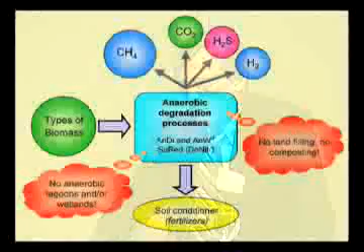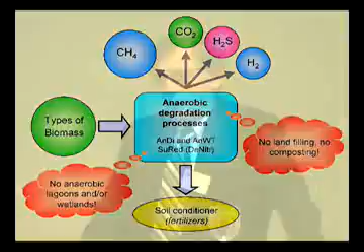So we have these types of biomass. The first process we need to apply is anaerobic degradation. Conventional anaerobic digestion processes or high rate anaerobic wastewater treatment processes. It can be also sulfate reduction. If we have anaerobic digestion or rotting somewhere in nature, we smell it because of the H2S or other volatile sulfur compounds. So everybody is warned. Something is happening there. But what we want is to use this process in the proper way.

Then we generate from biodegradable organic matter methane. Of course, it's a resource. It is an energy resource. CO2, some H2S, and possibly hydrogen, just by manipulating the system. But very important, we also produce soil conditioners.

Anaerobic treatment is the first step for removing biodegradable organic pollutants from a waste or a wastewater. I don't support, maybe we can have discussion about that, the use of lagoons or wetlands. I don't support it because they are very extensive treatment systems, and in fact we don't recover the energy produced from the digestion processes taking place in these systems.

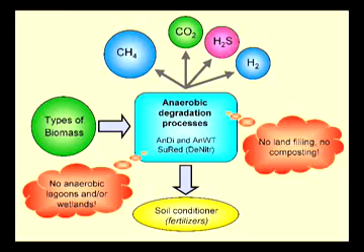The same, I don't like landfilling. It is old-fashioned, for the same reasons. And also not composting, because with composting we convert biodegradable organic matter into heat, but low-calorie heat, so of little value. So this is the heart of the system. But it is not a complete treatment.

The effluent of the anaerobic treatment system contains the nutrients: ammonia, phosphate, volatile sulfur compounds, salts. So we cannot discharge the effluent of an anaerobic reactor into a surface water. We could use the effluent for irrigation and fertilization. So that is the first step to a further valorization.

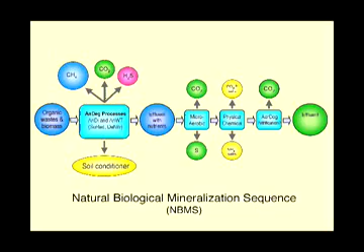But the point is, I'm going to emphasize several times, the more concentrated we keep our waste, the less diluted, the more concentrated is the effluent with respect to ammonia, phosphate, and these kind of very valuable fertilizers. The next step: we removed already all biodegradable organic matter in the first step. So what is left is just found in the soil conditioner.

The next step is a microaerobic step. Just putting in a little bit of aeration in order to get rid of malodorous compounds, H2S. And we saw this many, many years ago in the first anaerobic reactor, a kind of a white precipitate at the liquid-gas surface interface of the reactor, and it turned out to be sulfur. And later on, we started doing research in order to find out what is happening. It's a biological microaerobic conversion process, extremely interesting.

Next step is physical chemical treatment in order to recover in a very concentrated form the ammonium phosphate. And the last step, so we don't refuse to use any of the conventional processes, is an aerobic polishing step. Then we have a fine effluent, an extremely well-treated effluent at a very low cost. This is the natural biological mineralization sequence principle, NBMS. I hope you took it, because I'm going to speak about it again and again.

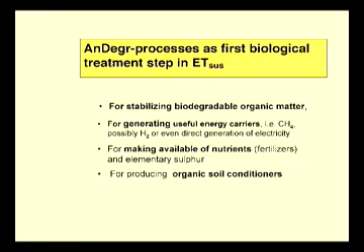This microaerobic first post-treatment step is extremely promising. It is the conversion of H2S, but also other volatile sulfur compounds, into elementary sulfur, which can be easily separated from the liquid. It is applicable for the removal of H2S from natural gas. It is already applied for this objective. A Dutch company, Paques, is working in this field very much. Shell, the big oil companies, they are interested in it. But it's also for the removal of malodorous compounds, these stinking compounds.

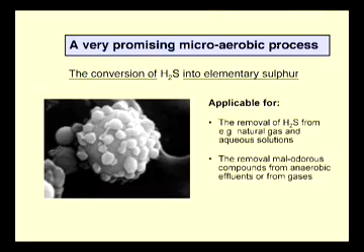It is microbiology, and I am a technologist. I didn't explain it to you, but you already understood it, I think. I was educated in Wageningen in physical chemical treatment, radioactive wastewater, but started working in 1970 based on a paper I will mention a few minutes later. And this is, you see, these organisms. This organism is excreting elementary sulfur. And we did this work in very close cooperation with Professor Gijs Kuenen from the Technical University Delft. He was here for 2 months. Very good cooperation. We did the technology, he did the microbiology.

So, supplementary conditions to be met for realizing waste valorization. It is not merely using this NBMS principle of treatment, but we need more. It is extremely essential. We need proper collection systems and transport systems for the residues. In fact, what we need: keep these wastes and wastewaters as concentrated as possible. Don't waste any clean water.

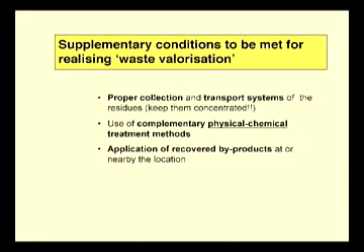Use complementary physical-chemical treatment methods to refine the recovered byproducts. Of course you can recover what you want, but if you don't use them, it makes little sense. So we have to use these recovered byproducts nearby the location for agricultural purposes. This is a kind of sustainable environmental protection, directed to pollution prevention, a high degree of self-sufficiency and robustness, and waste valorization.

We have a lot of tools to realize this. I don't want to go into detail since this is a general lecture, but just one thing: we should focus on transport limitation, not all these huge transport systems. I'll come back to that. And focus on sustainable innovations, meaning innovations which serve all people.

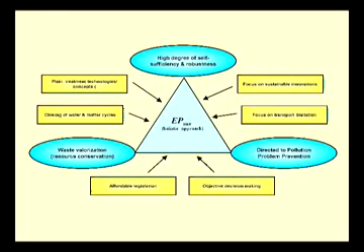So I think with this sustainable environmental protection, we also make a step towards a more sustainable future for our human society. It will help us eliminate the waste of mineral, natural and human resources. It's negative, what I'm saying now, is negative. I don't want to speak about negative things, but we live in this world, so I have to mention some.

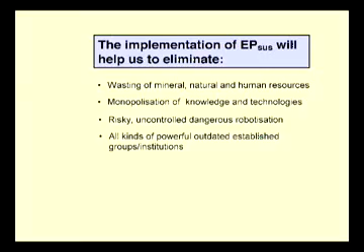Monopolization of knowledge and technologies, that is what we're doing day by day. Risky, uncontrolled, dangerous robotization, all kinds of powerful, outdated, established groups and institutions. Not so easy, but we have to get rid of it. I don't know how, but maybe anaerobic treatment could help. You are laughing, but I think it is too.

That was the first article I read when I came to Wageningen, knowing nothing about biological treatment. I don't know how or why, but I took this paper out of the file a few weeks ago, because it was still in Wageningen. I have it now, it is very valuable. So, Perry McCarty, he brought me on the way.

And at that time, there was the philosopher Teilhard de Chardin. I read his book and tried to understand it. I understood something, and made more or less my own philosophy from his ideas. But anyhow, he said a truth even seen by only one person will irrevocably find its way. I just looked to Perry. So what did he do?

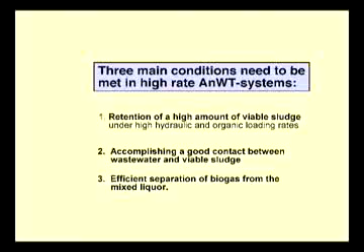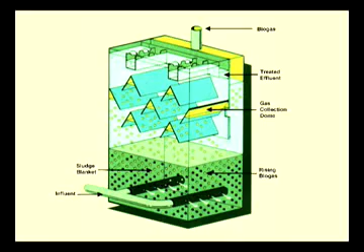The great advantage of anaerobic treatment compared to aerobic wastewater treatment is that it is resource producing, not demanding. We don't need any electricity. No excess sludge problems, because these anaerobic organisms grow very slowly, and the sludge we are creating in this reactor is extremely thick, so the volume is very small.

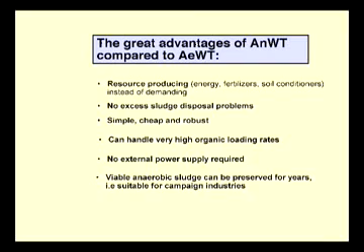It is simple, cheap, and robust. It can handle very high organic loading rates, up to 10, 15 times as high as conventional aerobic treatment systems. No external power supply, already mentioned. And very important: viable anaerobic sludge cultivated at some time of the year can be stored unfed for 6 to 10 months, and when you have new feed, a new campaign industry, you simply start feeding again.

Drawbacks—you always have to speak about drawbacks. I have problems with that when speaking about anaerobic treatment, because I don't see any drawback.

They speak about slow startup. This is just true the first time. But once you started your system, you harvest the sludge, conserve it, store it, and you can reuse it for new reactors.

So no problem anymore. Malodour nuisance? No, because we have this microaerobic post-treatment. Susceptible? All organisms are susceptible, aerobic or anaerobic. But if you know what you do, there is no problem.

Not a real problem. Little full-scale experience - not anymore, except in the public sector. Public sector, I mean sewage treatment. I'll come back to that.

It is true, anaerobic treatment systems just merely remove the organic pollutants. For me, it is a benefit, provided we meet the condition: keep the wastewaters as concentrated as possible, or in case we can reuse the effluent for irrigation all year long.

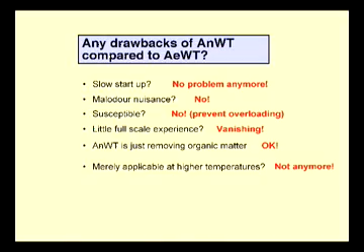Merely applicable at higher temperatures - this was the case. But as a result of all the research made during the last four decades, we know the system can be applied at very high temperatures, thermophilic conditions, and very low temperatures, even down to 4 degrees centigrade.

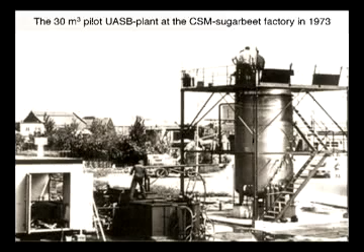This is a pilot plant installed at a sugar beet factory. It was extremely successful. And here is the group of people working on it - they're a little bit older now.

Extremely interesting, this UASB process is the formation of a very well-settling, very active granular sludge. This is so extremely fascinating for all kinds of disciplines, and so important. This granular sludge, up to 2-3 millimeters in size, is very well settling and extremely active because it is composed of viable consortia of anaerobic organisms. But there are a lot of questions.

I'm not going to go into detail, just mention a few. What is granulation? Okay, I will say something. Why, how, when does it develop? How does it grow, reproduce? Very interesting - maybe I'll say a few words. How can it be manipulated? This is fascinating for scientists. How can we cultivate a granular sludge which we want? And how can it be applied, for technologists?

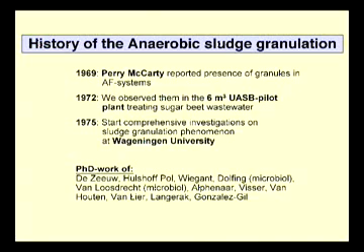And we started very comprehensive research. We observed it, we were fascinated by it, and so we did decades of research - PhD work of a lot of PhD students in the field are here. I will show them a little bit later.

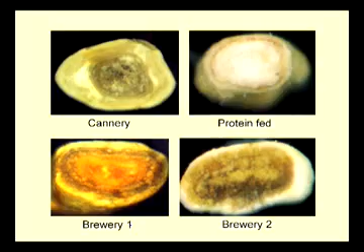We have many different types of granular sludge, depending on the wastewater we treat. Here are the pioneers - one is here, Look, where are you? He was the first who started doing the research in this field. And Jules van Lier, he did it in thermophilic conditions, but they did a lot of work in many other fields in this anaerobic treatment story.

These granular particles augment smoothly in a UASB reactor through a mechanism of occasional fragmentation. The how and the why is interesting, but not a point of discussion now.

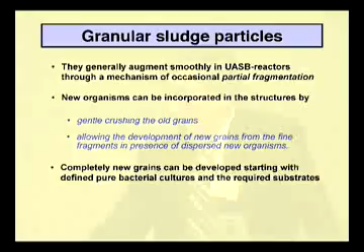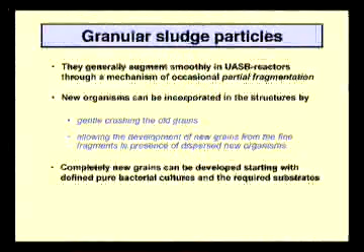New organisms which we need for a specific type of wastewater - because if we want to treat a very new type of wastewater with xenobiotics, we need new organisms, and they should be incorporated into the structures, into the old structures. This can only be achieved by gently crushing the old grains and growing them, allowing them to develop new grains together with these organisms we need.

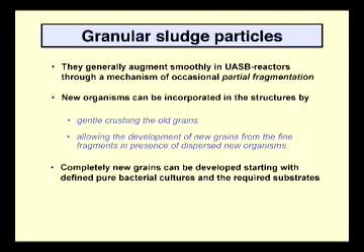And we can, of course, develop completely new grains based on pure cultures. All these kinds of things, a lot still has to be done.

Reasons for optimism to get sustainable environmental protection processes implemented: the industrial sector, since '76, very significant progress. First of all, in proper collection. They kept the wastewaters concentrated and separated, little if any dilution, minimizing transport, not all these huge sewer systems. They implemented this NBMS-based treatment technology, and we have excellent business by the companies, the contractors doing the job.

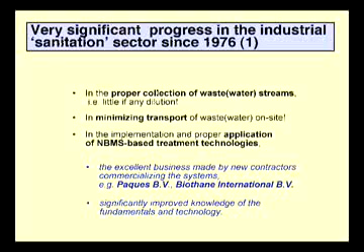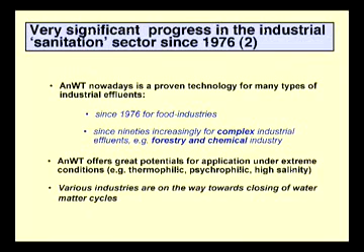Paques and Biothane, and of course there is a significantly better understanding of the basics and the technology of the system. Since '76, the system is applied for many food industries, but increasingly also for complex industrial effluents, forestry and chemical industries. It has a lot of potential for application under extreme conditions: high salinity, high temperatures, low temperatures. And many industries are on the way towards closing water and matter cycles.

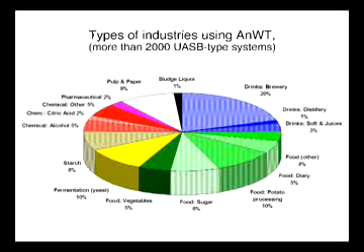Here's just an overview of the industries applying the system, particularly breweries, food industries, but very especially also pulp and paper industry. And Jim Field, you heard him, you saw him, and you should hear him many, many times again.

He did a very big job in this field. He was the second American who had a tremendous impact on my life. Positive, huh? Positive impact. And he was guided by Reyes. She did the same in this field. So she supported him, she guided him, and she did the same with me, together with Dora, of course.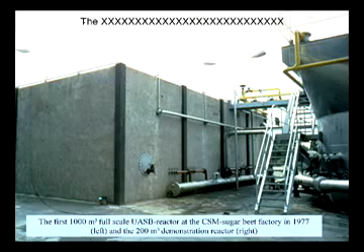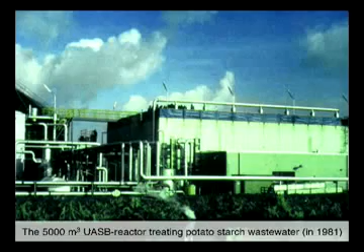This is the biggest UASB reactor we have, I would say had, treating potato starch wastewater in the northern part of Holland. A very difficult type of wastewater. Just one difficulty I want to mention.

This one was installed in '81. Campaign industry, only two months, a tremendous big reactor, no seed sludge available, very difficult type of wastewater. So how to get things going?

What we found in the laboratory: the sludge, the anaerobic bacteria, completely converted the pollutants into methane, but they didn't grow. We didn't have growth of new bacteria, which is essential. Only after we added a mixture of trace elements did the bacteria start growing. So this is one of the very fascinating things of anaerobic treatment.

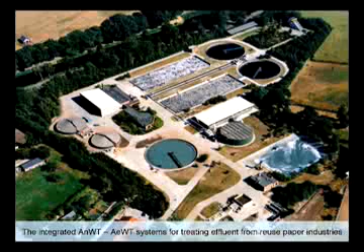Here's a paper, reuse paper industry. The anaerobic reactor is here. This is the first one, the second one, because more and more paper is reused. And the old aerobic treatment systems are in the back. And the biogas is treated to remove the H2S.

Then we have an expanded granular sludge bed reactor. It is using granular sludge, can apply very, very high loading rates. They are very tall reactors.

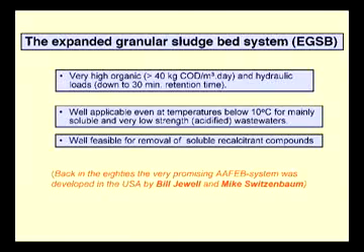I just want to mention the work in the United States made in the 80s, Bill Jewell, Mike Switzenbaum. It's more or less exactly the same system, but we used the granular sludge, and they used inert carriers on which biofilm was developing. But it's an expanded bed, not a fluidized bed. And here you have these tall reactors.

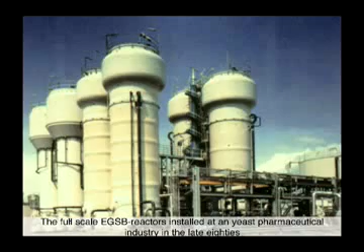Initially they were intended to be used as fluidized bed, complete fluidization, but it didn't work. It didn't work because we have detachment of the biofilm. So then later on, they started using the granular sludge. It was very successful.

So I just want to say something about the public sanitation sector. A very different story. I speak about the modern urban public sanitation sector. The collection is wrong. Concentrated domestic waste is flushed away with a lot of water. We have very big, expensive, vulnerable transport systems, the sewers. Non-sustainable—every 40 years we have to rebuild them.

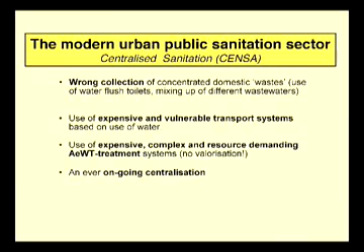We have these aerobic wastewater treatment systems which are energy demanding. And I hope I explained we don't need them if we do the proper job. It is going to get bigger, bigger, bigger. This is what you know, what I want to have eliminated. So we need a new paradigm in the public sector. I hope this is clear for you.

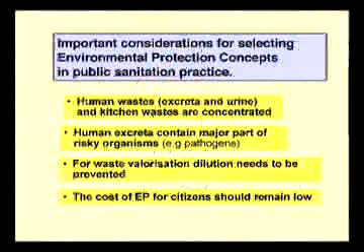We need prevention of pollution of clean water, no misuse of tap water to flush away our concentrated waste, and we need valorization of the residues. And why? I already mentioned some reasons, but first of all, human waste—excreta and urine—and kitchen waste are extremely concentrated. We got it from nature. Human excreta contain a major part of the risky organisms, the pathogens.

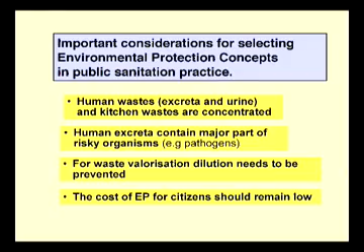So why dilute this? Why should we create problems? We create problems. For waste valorization, we shouldn't have dilution. It makes everything more difficult. And the cost for environmental protection for the citizens should remain low.

Just for illustration, urine contains 85% of this nitrogen. Feces only 11.5. So the black water, combined excreta and urine, 96.5%. Organic matter, mainly in the feces. Phosphorus in urine and feces. Potassium, especially in the urine.

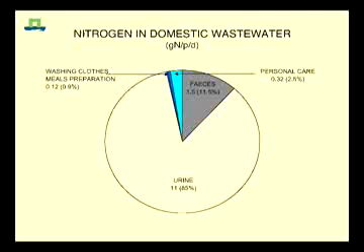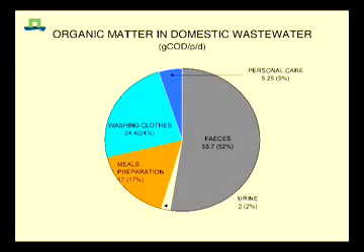So I already presented this in the table, but you can see here the urine containing almost all the nitrogen. Here the organic matter, especially in the feces, in meal preparation. So if we combine these two, we have almost 70-80% of the organic matter. The P and the potassium.

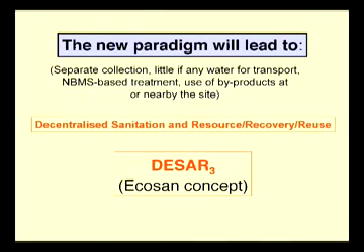So the new paradigm, the separate collection, no water transport, the NBMS-based treatment, etc., will lead to decentralized sanitation and resource recovery and reuse. DESAR. That is what we promote. Or Ecosan. And Grietje Zeeman, she is also here somewhere. She is the big woman in our department working in this field and promoting this very much in Holland. And even from the established public sanitation sector, she gets more and more support.

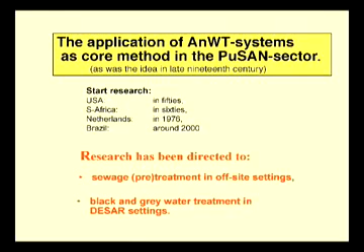This research on wastewater treatment using the anaerobic wastewater treatment system already started in the United States in the 50s. Later in the 60s in South Africa, in 76 in the Netherlands, and around 2000 in Brazil. And the research has been directed to sewage and black and grey water treatment. Sewage treatment as a first step, and black and grey water.

I want just to present, in my opinion, a very ideal solution for the public sector. It is just recently developed. We are going to introduce this with a group. The greenhouse village concept. It is a very holistic approach. We need a lot of different disciplines, sanitary, chemical, civil engineers, biotechnology, etc. Even lawyers, I think.

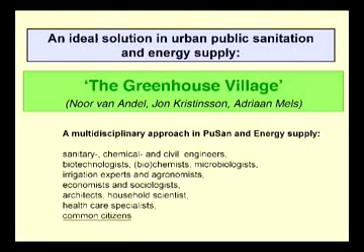And what is the idea? Very shortly. We have the greenhouse, and I just speak about Dutch conditions. We have the greenhouse for collection of heat during summertime, using a very sophisticated new type of heat exchanger. And the heat is collected using the groundwater, and the warm groundwater is reintroduced in the aquifer. This greenhouse, it is a closed greenhouse, also produces food, crops, and clean water, condensed water.

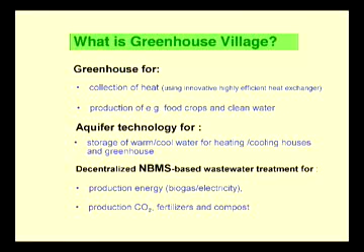The aquifer we use for storage of warm and cool water. So warm water to heat the greenhouse during wintertime, and the houses of the community during wintertime, and in summertime the reverse. And we combine the system with the NBMS-based wastewater treatment system. So we have a community, minimum 200 houses, apartment buildings or whatsoever, and the wastewater from that community is treated anaerobically, producing energy. The biogas is converted into electricity, and the CO2 from that is reintroduced in the greenhouse because we need CO2 for breeding the plants. This is the concept.

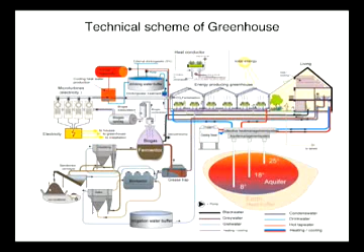It is relatively high-tech, but if we use high-tech in the proper way, for common interest, I think there is no objection against high-tech. It is not super high-tech. And in the public sector, we can only introduce these sustainable concepts step by step because we made huge investments in the centralized systems and in the sewer system, etc.

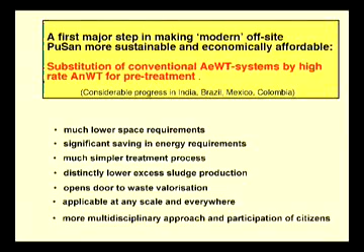So step by step, and the major first step in making modern public sanitation sustainable and economical is substitution of conventional aerobic wastewater treatment systems by high-rate anaerobic treatment systems. And the reasons for that I already mentioned several times: lower space requirements, saving energy, etc. So I don't want to go into detail.

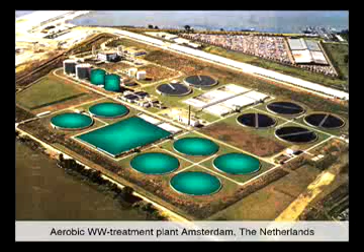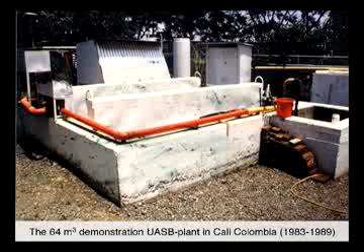Here we have the sewage treatment plant Amsterdam with aerobic treatment, with sludge digesters, with all kinds of settlers, primary, secondary. But if we replace the primary settlers and the aeration system and part of the post-settlers by one anaerobic pre-treatment step, we save a lot of space, even in our moderate climates, but especially in developing countries. And here we have a pilot plant, which was installed in 1983 in Cali, Colombia, in order to demonstrate the feasibility of the system for domestic sewage treatment.

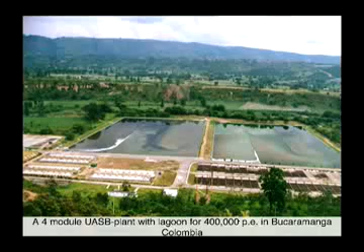Colombia, the same story. We have anaerobic treatment under construction here in the foreground, and effluent post-treatment in a lagoon. I just want to say something about renewable energy production from biomass.

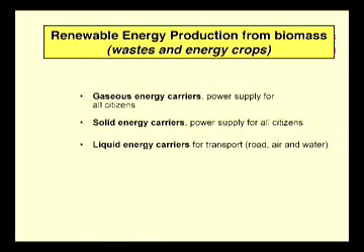So what about that? It can be gaseous energy carriers for power supply of the citizens, methane, for example. Solid energy carriers for power supply of the citizens. But also liquid energy carriers, which have the big interest presently. And anaerobic digestion processes comprise, to our idea, a superior system for producing renewable energy from wet types of biomass.

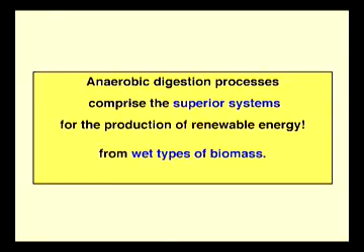I am going to show you this. Just focusing on sugarcane, so Brazil. Of course, everywhere presently, in Holland, in Europe, United States, they want to produce alcohol, just for the car. So, considering what is going on, the net energy production based on the energy content of the sugarcane is only 38%. The effluent of the fermentation process contains about 10% of the net energy,

but it is used in the fields for irrigation. So the energy present in the organic pollutants is lost. And half of the bagasse is also lost because the other half you need for distillation. We can use the anaerobic treatment system. Then we have a net energy production of 48%, including 10% of biogas produced from the wastewater.

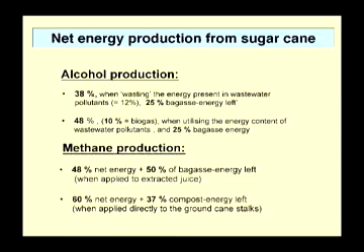Or if we crush the sugarcane stalks and we apply direct anaerobic digestion, we have 60% net energy production and a lot of compost. So it's much more sustainable. I don't want to speak about that anymore. This is what is our fate, also in Europe.

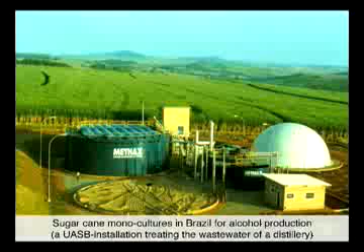In Brazil we have these monocultures of sugarcane. This has to be in bigger and bigger areas. It is not biodiversity, I think. It's the contrary. The politicians in Europe and also oil companies, they want to force us in the same direction. We don't have the land. We are destroying our landscape just for making liquid fuel.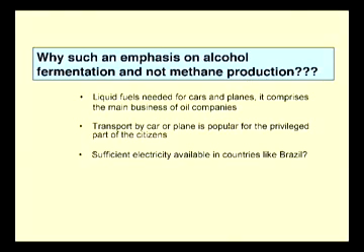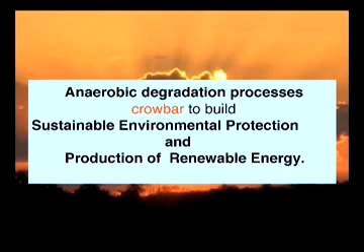And that is what I said, and it is written down here, and I'll leave it with that. And I come to my summary and conclusion. I hope I made clear that anaerobic degradation, we need it. It is natural, and it leads to new creative life for everybody. We should use anaerobic degradation processes. It is the crowbar to build sustainable environmental protection and production of renewable energy.

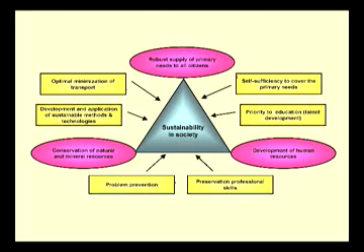And along with the development and implementation of sustainable environmental protection, we make progress to, that is what I hope, that is what I want, and that is what I expect, a more sustainable society. And a sustainable society, it is development of human resources. It is a robust supply of primary needs to all citizens. All citizens. It is conservation of natural and mineral resources.

And we have a lot of tools. Just a few here. I am not going to explain this or go in detail because it is a matter of discussion. So we want to go, I think all of us, towards more sustainability in a globalizing world. To my opinion, there are two main criteria for sustainability. First of all, it is resource conservation, fossil energy and chemicals, and biodiversity in nature.

Secondly, maybe even more important, the well-being of mankind. Social security, work for everybody. Also, they should take the work. Spiritual development. And the priorities to be put: the first priority is for terrains fully belonging to our own human responsibility. And the second, for terrains not or partially belonging to our human responsibility.

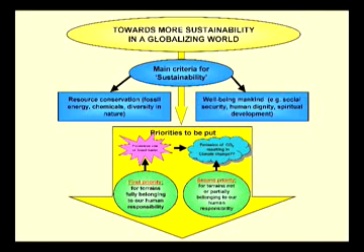So, what are we doing? An excessive use of fossil fuel. That is what we do. And it belongs absolutely to our responsibility. We create a lot of CO2. Everybody speaks about it. It may result in climate change. So, actions: problem prevention, first of all, and resolving problems inherited or self-created.